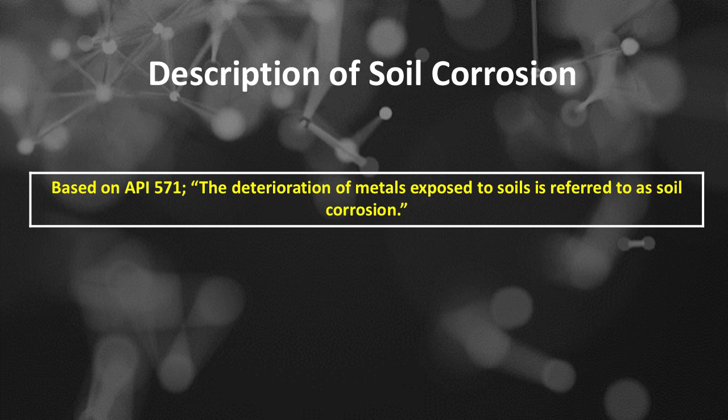Soil corrosion damage mechanisms as a part of uniform or localized loss of thickness. Description based on API 571: the deterioration of metals exposed to soils is referred to as soil corrosion. It refers to the degradation of materials, particularly metals, as a result of electrochemical reactions occurring in soil environments, influenced by various soil characteristics and environmental factors, making it a significant concern for infrastructure such as pipelines, foundations, and buried structures.

Here are key aspects of soil corrosion damage. Number 1 is mechanisms of soil corrosion. Electrochemical reactions: soil acts as an electrolyte, facilitating electrochemical reactions between metallic surfaces and corrosive ions present in the soil. These reactions can result in the loss of metal mass over time.

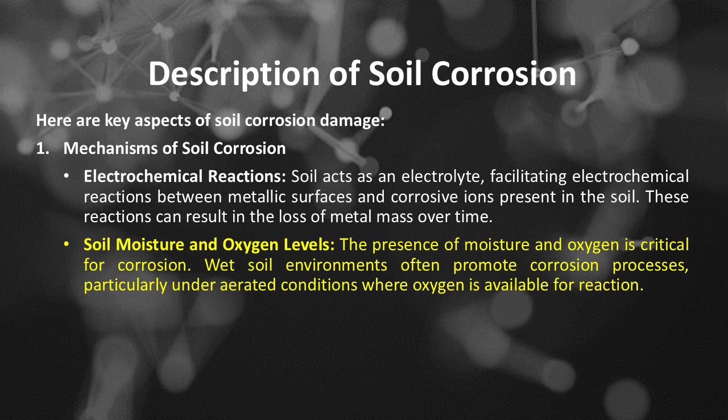Soil moisture and oxygen levels: the presence of moisture and oxygen is critical for corrosion. Wet soil environments often promote corrosion processes, particularly under aerated conditions where oxygen is available for reaction. Soil pH: the acidity or alkalinity of the soil affects corrosion rates. Acidic soils, low pH, are typically more corrosive due to higher concentrations of hydrogen ions, while alkaline soils, high pH, may offer some protection.

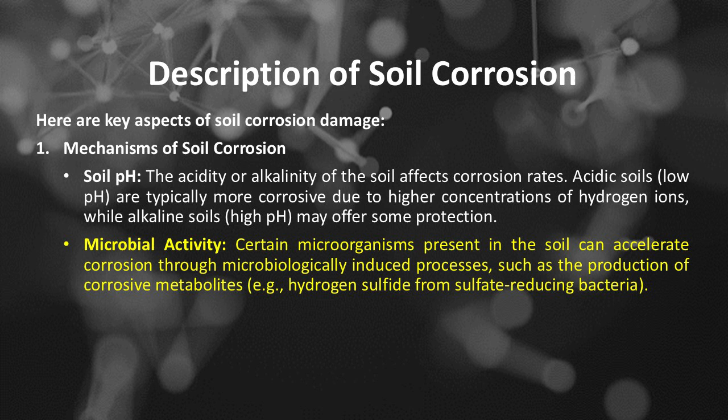Microbial activity: certain microorganisms present in the soil can accelerate corrosion through microbiologically induced processes, such as the production of corrosive metabolites, such as hydrogen sulfide from sulfate-reducing bacteria.

Number 2 is types of soil corrosion. Uniform corrosion: a relatively uniform loss of material occurs across the surface of the metal, usually resulting from direct exposure to corrosive soil conditions. Pitting corrosion: localized areas of corrosion can develop into pits, which leads to significant localized thinning and weakening of the metal. This type of damage can be particularly dangerous for structural and pressure-containing components.

Galvanic corrosion occurs when dissimilar metals are in electrical contact and buried in soil, leading to accelerated corrosion of the less noble metal. Crevice corrosion can occur in areas where soil becomes trapped, leading to stagnant conditions that promote localized corrosion, particularly in joints, seams, or fittings. Number 3 is factors influencing soil corrosion.

Soil composition: the presence of salts, such as chlorides and sulfates, can be highly corrosive. Organic materials and varying clay content also influence soil conductivity and corrosion processes. Temperature: increasing temperatures can enhance microbial activity, accelerating corrosion rates. Electrical resistance: soils with high resistivity, such as dry, sandy soils, may exhibit lower corrosion rates than highly conductive soils, such as wet, clay-rich soils.

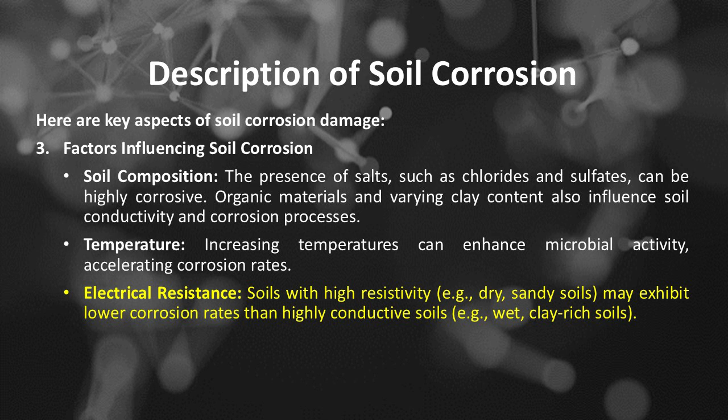Number 4 is consequences of soil corrosion. Structural damage: corrosion can lead to the failure of buried pipelines, underground tanks, and foundations, causing leaks, collapses, and environmental contamination. Economic costs: maintenance, repair, and replacement of corroded infrastructure result in significant economic costs. Additionally, unplanned service interruptions can disrupt operations and lead to financial losses.

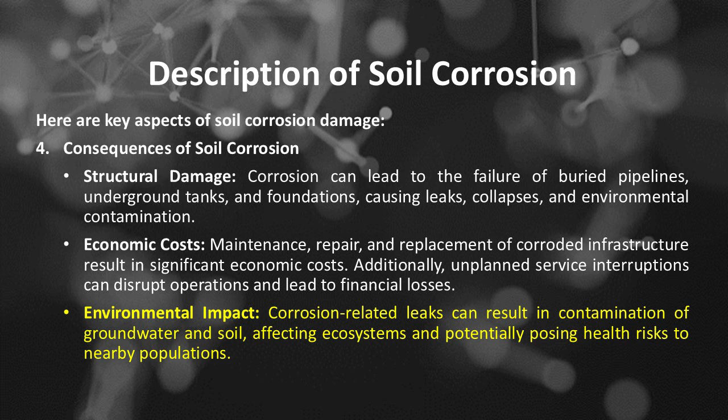Environmental impact: corrosion-related leaks can result in contamination of groundwater and soil, affecting ecosystems and potentially posing health risks to nearby populations. In conclusion, soil corrosion is a complex issue that can lead to significant material degradation and structural failures. Understanding its mechanisms and influencing factors is essential for implementing effective detection and mitigation strategies, ensuring the integrity and longevity of buried structures and infrastructure over time.

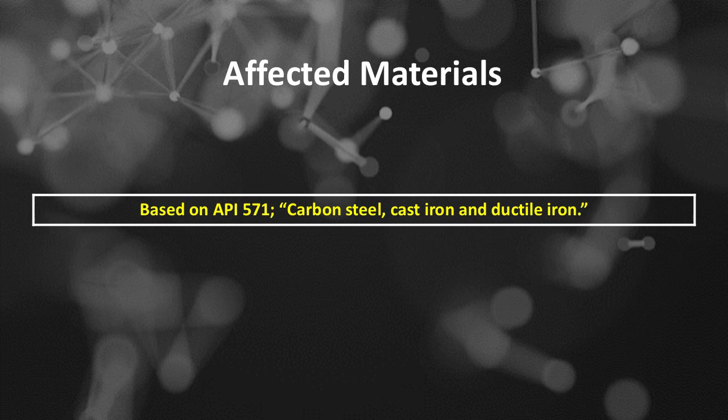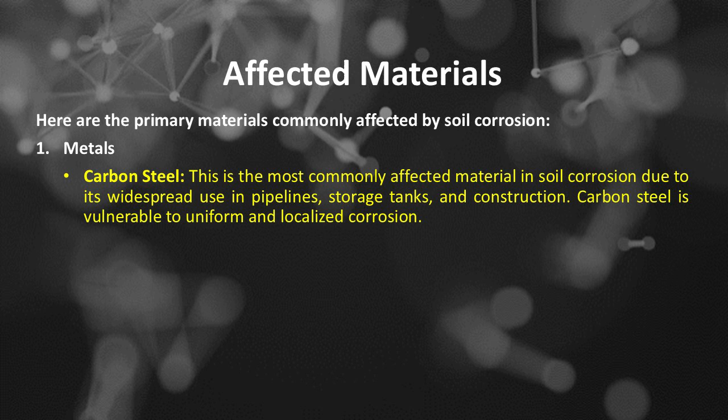Soil corrosion affected materials based on API 571: carbon steel, cast iron, and ductile iron. Soil corrosion can affect a variety of materials, particularly those used in underground applications and infrastructure. Here are the primary materials commonly affected. Number 1 is metals. Carbon steel is the most commonly affected material in soil corrosion due to its widespread use in pipelines, storage tanks, and construction. Carbon steel is vulnerable to uniform and localized corrosion.

Cast iron, often used for pipes in sewage and water distribution systems, can corrode due to soil conditions such as moisture, acidity, and microbial activity. Copper is generally resistant to corrosion, but can still be affected in some soil environments, particularly due to galvanic corrosion when in contact with other metals.

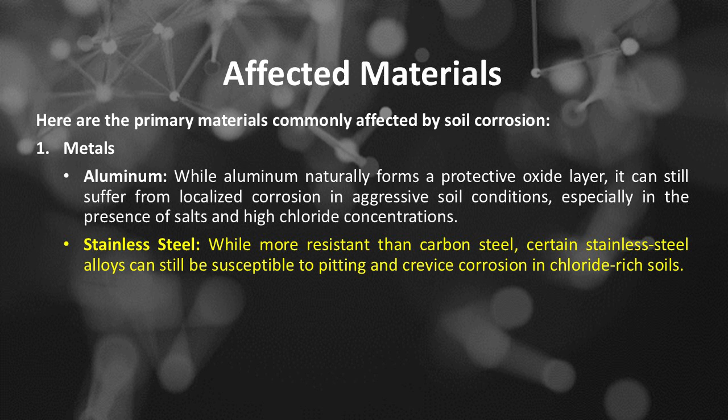Aluminum naturally forms a protective oxide layer, but it can still suffer from localized corrosion in aggressive soil conditions, especially in the presence of salts and high chloride concentrations. Stainless steel, while more resistant than carbon steel, certain stainless steel alloys can still be susceptible to pitting and crevice corrosion in chloride-rich soils.

Number 2 is composites and reinforced materials. Reinforced concrete: the steel reinforcement bars, rebar, within concrete are susceptible to corrosion, particularly when exposed to moisture and chlorides that can penetrate and compromise the protective alkalinity of the concrete.

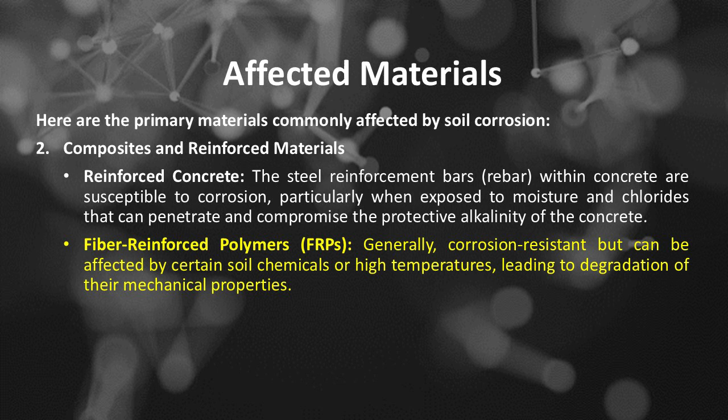Fiber-reinforced polymers (FRPs) are generally corrosion-resistant but can be affected by certain soil chemicals or high temperatures, leading to degradation of their mechanical properties. Number 3 is coatings and liners.

Protective coatings, even the most robust like epoxy or polyurethane, can suffer degradation over time, especially if moisture penetrates underlying layers or if there are defects in the application. Polymeric liners, used to protect metal surfaces from corrosion, can degrade over time due to chemical exposure, soil abrasion, or mechanical damage.

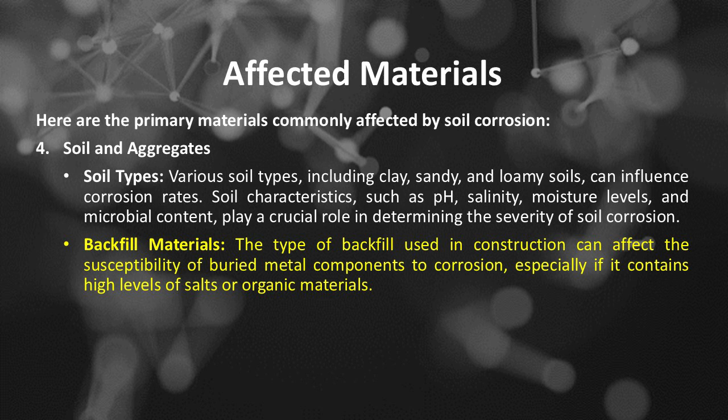Number 4 is soil and aggregates. Various soil types, including clay, sandy, and loamy soils, can influence corrosion rates. Soil characteristics such as pH, salinity, moisture levels, and microbial content play a crucial role in determining the severity of soil corrosion. The type of backfill used in construction can affect the susceptibility of buried metal components to corrosion, especially if it contains high levels of salts or organic materials.

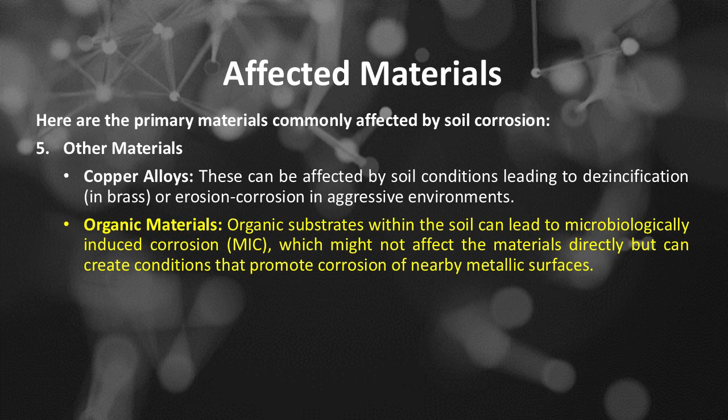Number 5 is other materials. Copper alloys can be affected by soil conditions leading to dezincification in brass, or erosion corrosion in aggressive environments. Organic substrates within the soil can lead to microbiologically induced corrosion, or MIC, which might not affect the materials directly but can create conditions that promote corrosion of nearby metallic surfaces.

Key takeaways: soil corrosion can impact a broad range of materials, but metals, particularly carbon steel, copper, and stainless steel, are the most commonly affected. The severity and type of corrosion depend on various factors, including soil characteristics, moisture levels, and the presence of corrosive agents. Implementing proper material selection, protective measures, and regular monitoring can help mitigate the risks associated with soil corrosion.

Soil corrosion critical factors based on API 571, Number A: the severity of soil corrosion is determined by many factors including operating temperature, moisture and oxygen availability, soil resistivity, soil condition and characteristics, soil type, water drainage and homogeneity, variation in soil type, cathodic protection, stray current drainage, and coating type, age, and condition.

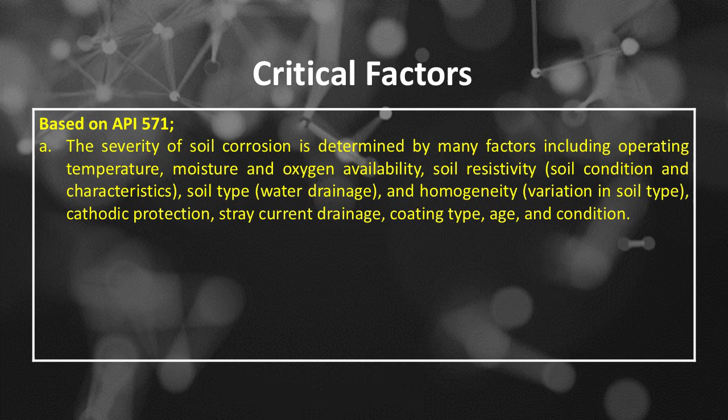Number B: There is no single parameter that can be used to determine soil corrosivity. Instead, a number of characteristics must be combined to estimate the corrosion in a particular soil, as outlined in ASTM STP 741, as well as API RP 580 and API RP 581.

Number C: Soil resistivity is frequently used to estimate soil corrosivity, mainly because it is easy to measure. Soil resistivity is related to soil moisture content and dissolved electrolytes in the soil water. Number D: Soils having high moisture content, high dissolved salt concentrations, and high acidity are usually the most corrosive.

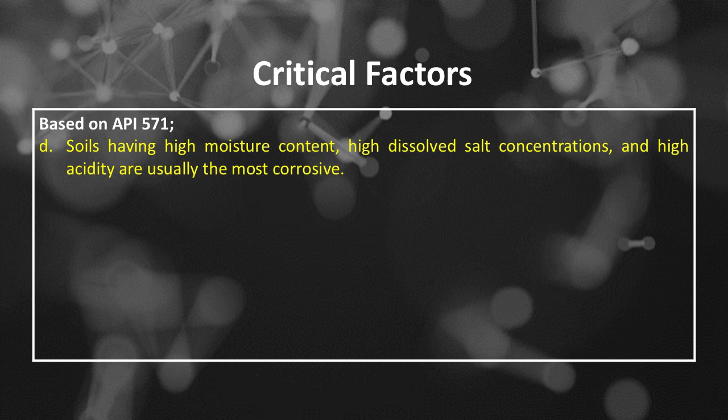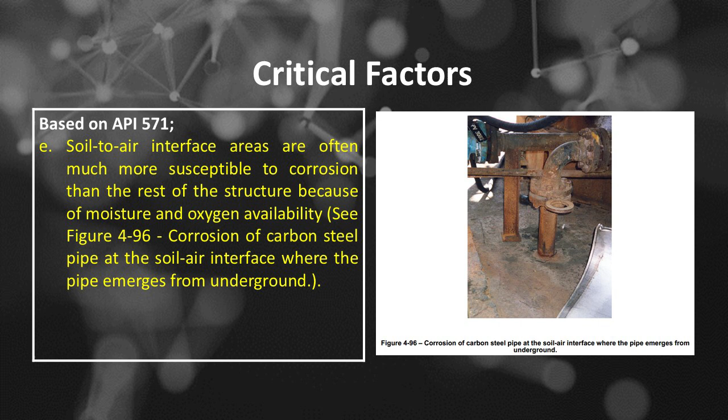Number E: Soil-to-air interface areas are often much more susceptible to corrosion than the rest of the structure because of moisture and oxygen availability. See Figure 4-96, corrosion of carbon steel pipe at the soil-air interface where the pipe emerges from underground. Number F: Corrosion rates increase with increasing metal temperature.

Number G: Other factors that affect soil corrosion include galvanic corrosion, dissimilar soils, stray currents, differential aeration corrosion cells, and microbiologically induced corrosion.

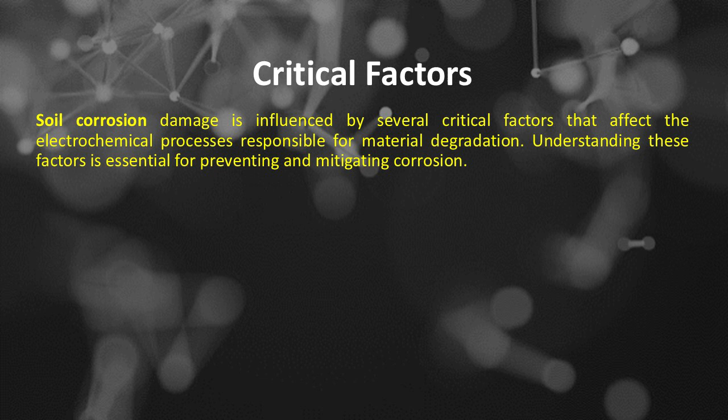Soil corrosion damage is influenced by several critical factors that affect the electrochemical processes responsible for material degradation. Understanding these factors is essential for preventing and mitigating corrosion. Here are the key critical factors of soil corrosion.

Number 1 is soil composition. Soil type: the composition of the soil, whether clay, sand, loam, or silt, determines its moisture retention, pH, and chemical reactivity, all of which contribute to corrosion rates.

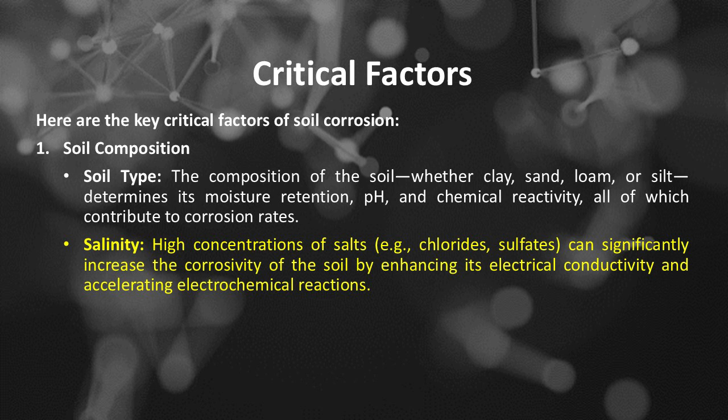Salinity: high concentrations of salts, such as chlorides and sulfates, can significantly increase the corrosivity of the soil by enhancing its electrical conductivity and accelerating electrochemical reactions. Organic content: the presence of organic materials can lead to microbiologically influenced corrosion, or MIC, where bacteria produce corrosive compounds that attack metal surfaces.

Number 2 is soil moisture. Water content: the presence of moisture is critical for most corrosion processes. Excess water can facilitate the movement of corrosive ions and promote electrochemical reactions. Drainage conditions: well-drained soils that retain less moisture can be less corrosive than poorly drained soils, which maintain saturated conditions that support corrosion.

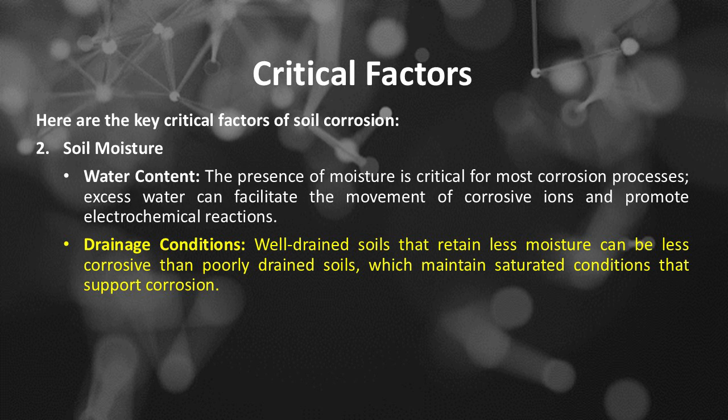Number 3 is pH level. Acidity or alkalinity: soil pH affects the corrosiveness of the environment. Acidic soils, pH less than 7, tend to be more aggressive due to higher concentrations of hydrogen ions, while alkaline soils, pH greater than 7, can sometimes offer protective effects for certain materials.

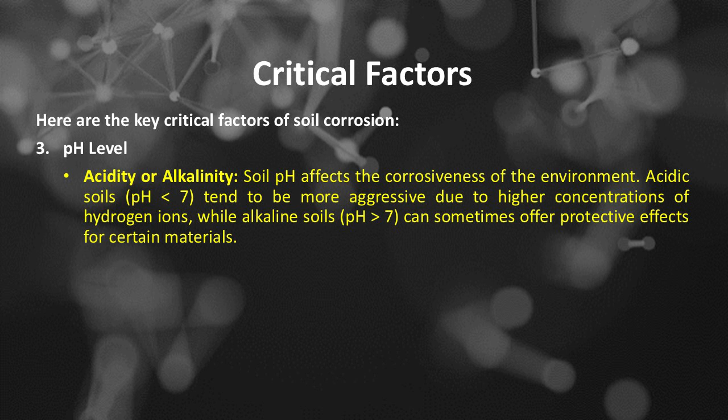Number 4 is redox potential. Oxidation-reduction reactions: the soil's oxidation-reduction potential, EH, indicates its capacity to support electrochemical reactions.

Low redox potential environments, often found in anaerobic conditions, can be particularly conducive to corrosion, especially for metals.

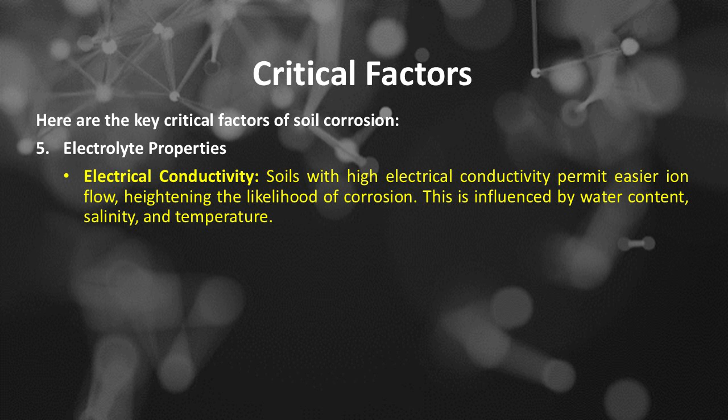Number 5 is electrolyte properties. Electrical conductivity: soils with high electrical conductivity permit easier ion flow, heightening the likelihood of corrosion. This is influenced by water content, salinity, and temperature.

Number 6 is temperature. Thermal effects: higher temperatures can accelerate corrosion processes by increasing reaction rates and enhancing microbial activity. Seasonal variations can also affect temperature and, subsequently, corrosion rates.

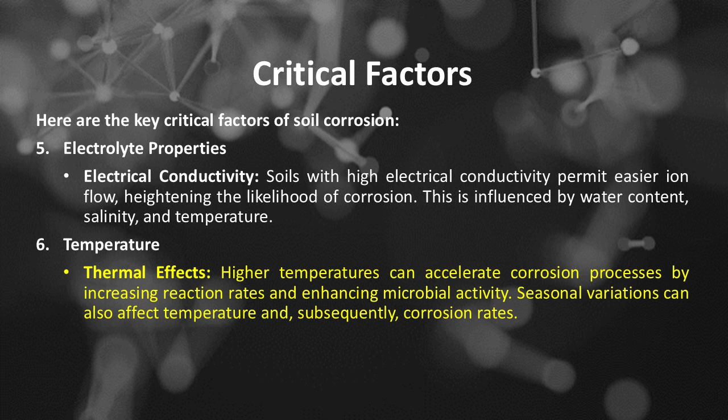Number 7 is microbial activity. Microorganisms, the presence of bacteria and fungi can influence soil corrosion. Specific bacteria can produce acidic byproducts or other corrosive metabolites, facilitating corrosion processes.

Number 8 is soil aeration. Oxygen availability: aerated soils can support corrosion due to the presence of oxygen, which is essential for many electrochemical reactions. Conversely, anaerobic environments may slow down corrosion processes in certain conditions.

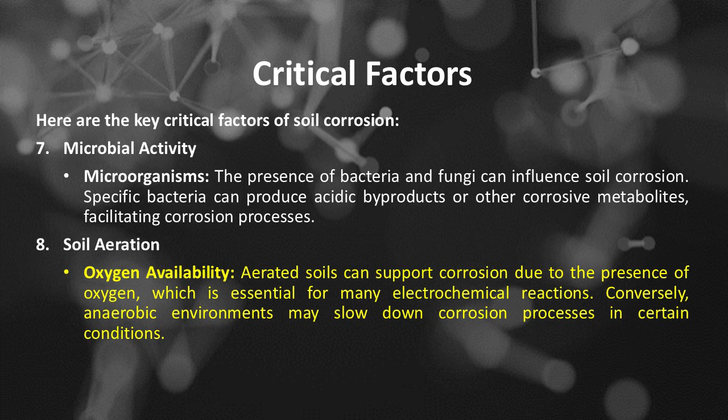Number 9 is material properties. Material composition and microstructure: different metals and alloys exhibit varying degrees of resistance to corrosion based on their composition, microstructure, inherent protective coatings, and passive oxide layers. Surface conditions: surface roughness, cleanliness, and the presence of protective coatings affect susceptibility to corrosion.

Number 10 is geological factors. Soil compaction: compacted soils can reduce moisture retention but may also trap corrosive agents against metal surfaces, potentially exacerbating localized corrosion. Soil variation: variability in soil composition and properties across a site can lead to uneven corrosion rates in infrastructure.

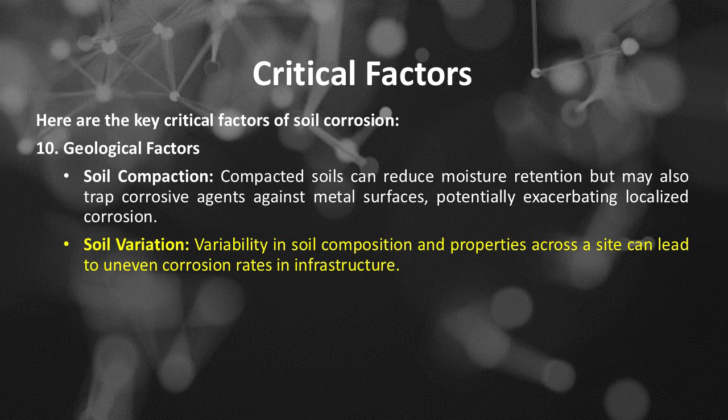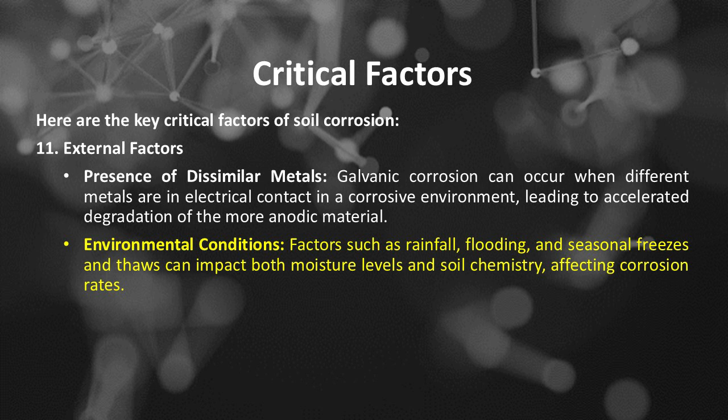Environmental conditions: factors such as rainfall, flooding, and seasonal freezes and thaws can impact both moisture levels and soil chemistry, affecting corrosion rates. In conclusion, soil corrosion damage is a multifaceted issue influenced by a variety of factors that interact with one another.

By understanding these critical factors, engineers and maintenance personnel can better design, monitor, and maintain buried structures and infrastructure to reduce the risks associated with soil corrosion. Regular assessments and mitigation strategies based on these factors are essential for the longevity and integrity of affected materials.

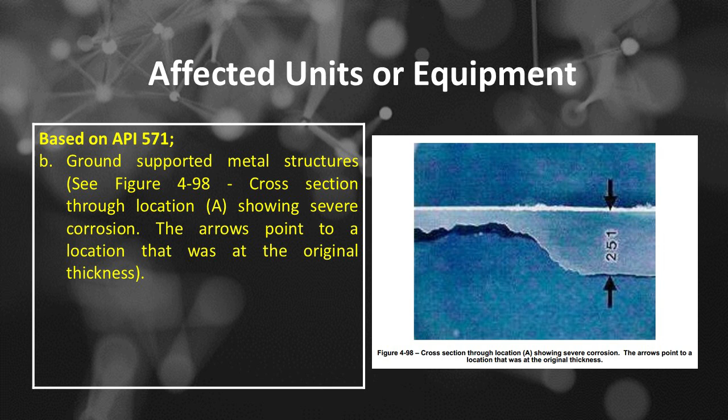The external surface is shown. Number B, ground-supported metal structures, see Figure 4-98: cross-section through location A, showing severe corrosion. The arrows point to a location that was at the original thickness.

Soil corrosion can have significant impacts on various units, equipment, and infrastructure that are buried or in direct contact with the soil. Here are some of the primary units and types of equipment commonly affected by soil corrosion.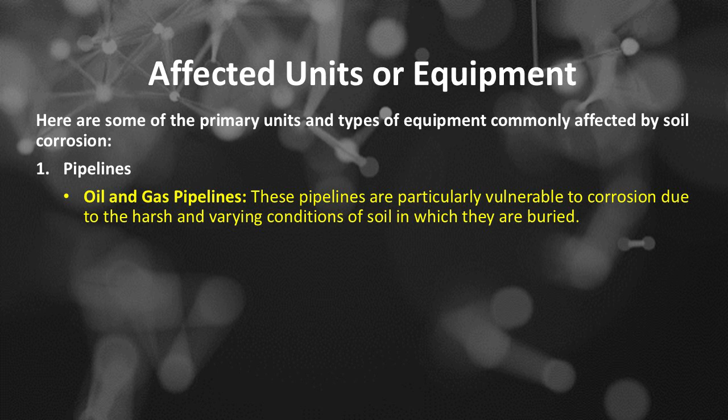Number 1 is pipelines. Oil and gas pipelines: these pipelines are particularly vulnerable to corrosion due to the harsh and varying conditions of soil in which they are buried. Water and sewage pipes: both cast iron and steel water lines can experience significant corrosion, leading to leaks and contamination.

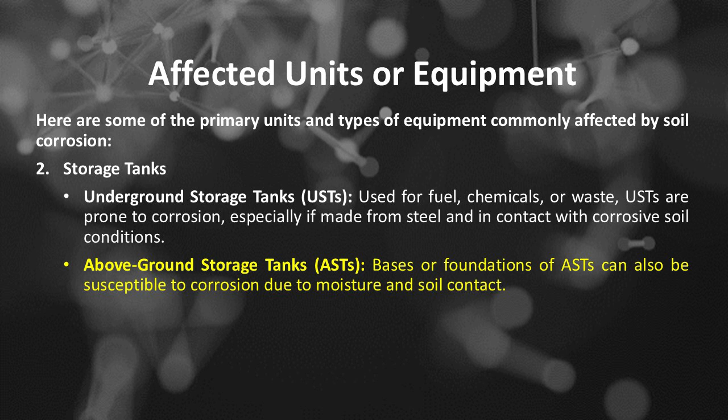Number 2 is storage tanks. Underground storage tanks, USTs, used for fuel, chemicals, or waste are prone to corrosion, especially if made from steel and in contact with corrosive soil conditions. Above-ground storage tanks, ASTs: bases or foundations of ASTs can also be susceptible to corrosion due to moisture and soil contact.

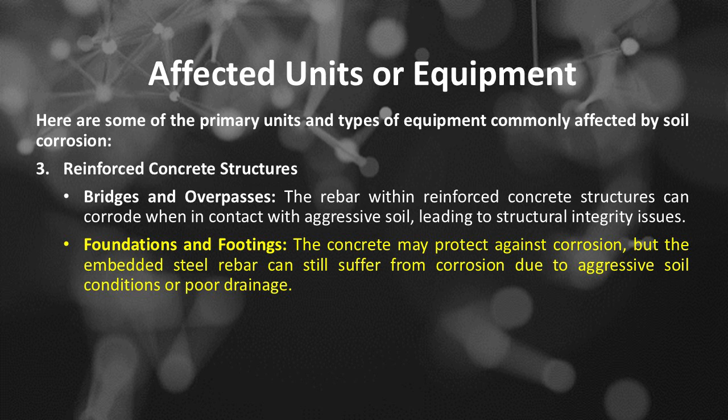Number 3 is reinforced concrete structures. Bridges and overpasses: the rebar within reinforced concrete structures can corrode when in contact with aggressive soil, leading to structural integrity issues. Foundations and footings: the concrete may protect against corrosion, but the embedded steel rebar can still suffer from corrosion due to aggressive soil conditions or poor drainage.

Number 4 is civil engineering structures. Retaining walls: wall anchors and reinforcements can be compromised by soil corrosion, affecting structural stability. Dams and levees: embedded steel components or foundations can be susceptible to corrosion from the surrounding soil.

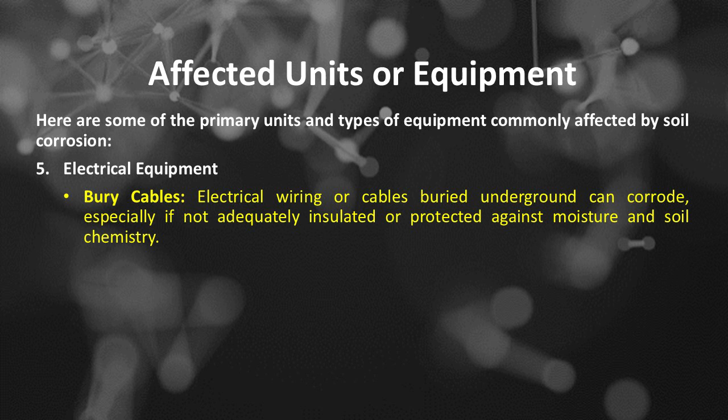Number 5 is electrical equipment. Buried cables: electrical wiring or cables buried underground can corrode, especially if not adequately insulated or protected against moisture and soil chemistry. Grounding systems: ground rods and connections can corrode, leading to ineffective grounding and increased electrical resistance.

Number 6 is agricultural equipment. Irrigation systems: pipes and fittings used in irrigation can be subject to corrosion, particularly when in contact with saline or acidic soils.

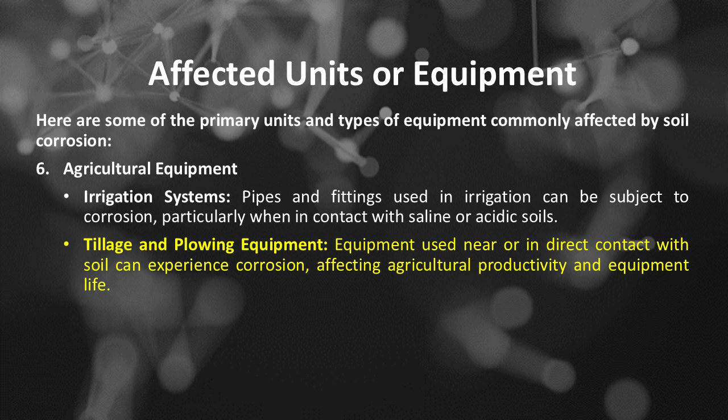Tillage and plowing equipment used near or in direct contact with soil can experience corrosion, affecting agricultural productivity and equipment life. Number 7 is transportation infrastructure.

Railway tracks and sleepers: metal components of rail systems, including tracks and attachments, can be compromised due to soil corrosion. Foundation supports: steel supports and pylons for roads, bridges, and tunnels can experience corrosion damage when in contact with moist soil. Number 8 is cultural and historical artifacts.

Archaeological finds: metal artifacts buried in soil can be prone to corrosion, especially if they are made from iron or other susceptible materials. Number 9 is ducts and plumbing.

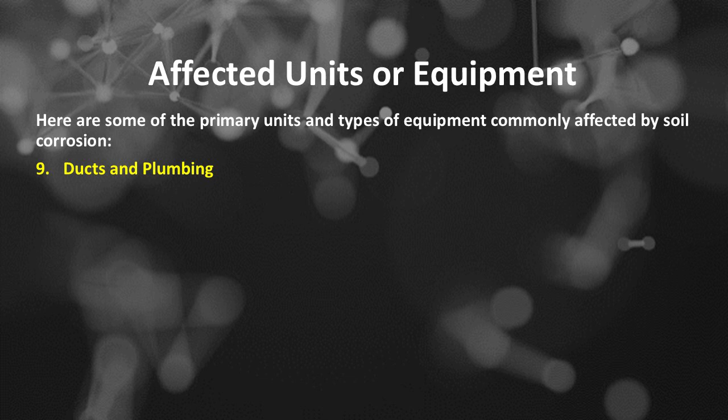Ventilation ducts: even non-metallic ducts can be indirectly affected by corrosion due to moisture and chemical interactions within the soils they are buried near. Sewer systems: pipes and fittings in sewer systems are vulnerable to corrosion from both soil and the waste they carry.

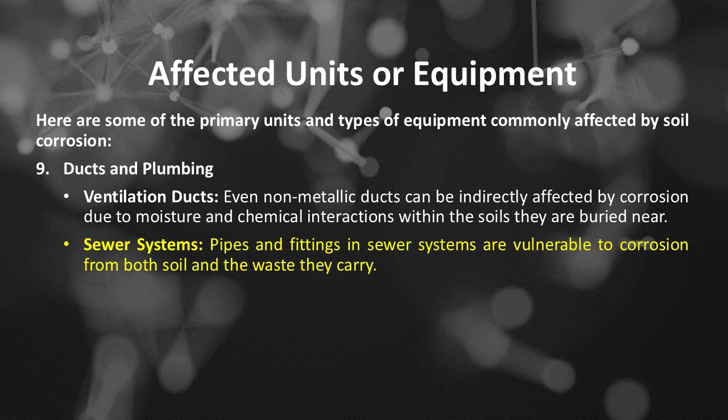Number 10 is fuel distribution systems. Service station pumps and piping: corrosion can affect underground piping used for distributing gasoline or other fuels, leading to leaks and environmental hazards.

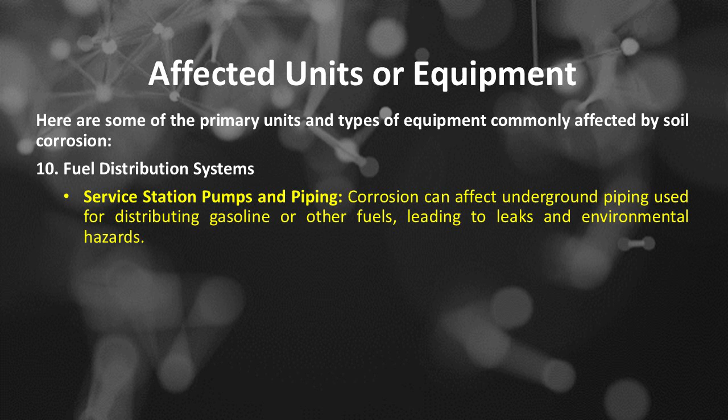Number 11 is foundational elements of buildings. Building foundations: steel reinforcements in foundations can corrode, potentially leading to structural failures over time.

In conclusion, soil corrosion can impact a wide range of units and equipment, particularly those that are buried or permanently installed in the ground. Its effects can lead to costly repairs, structural failures, and safety hazards, emphasizing the importance of understanding soil characteristics and employing proper protective measures to mitigate corrosion risks. Regular monitoring and maintenance of affected infrastructure are crucial to prolonging the lifespan and ensuring the integrity of these materials and systems.

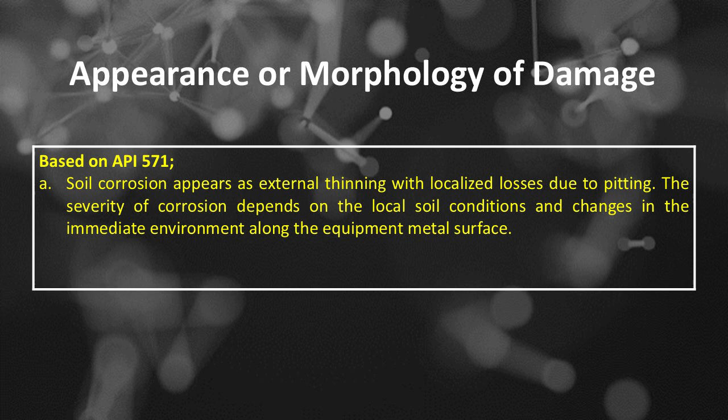Appearance or morphology of soil corrosion damage based on API 571. Number A: soil corrosion appears as external thinning with localized losses due to pitting. The severity of corrosion depends on the local soil conditions and changes in the immediate environment along the equipment metal surface. Number B: poor condition of a protective coating is a telltale sign of potential corrosion damage.

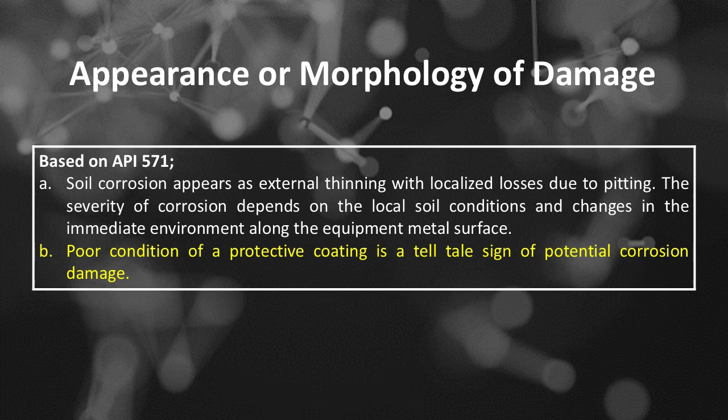The appearance or morphology of soil corrosion damage can vary widely depending on several factors, including the materials involved, soil composition, environmental conditions, and the specific corrosion mechanisms at play. Here are some common characteristics and forms of corrosion damage that can be observed.

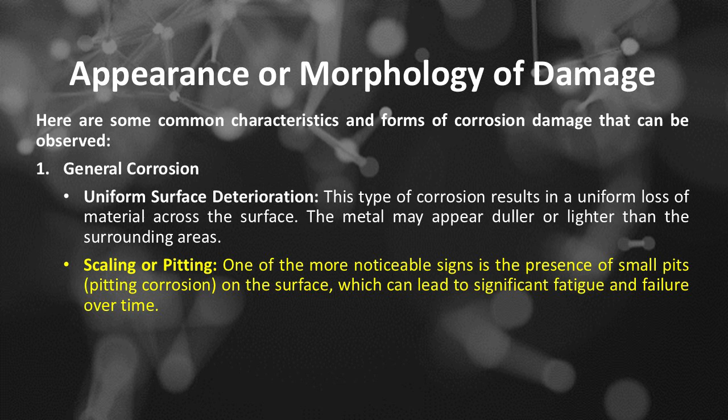Number 1 is general corrosion. Uniform surface deterioration: this type of corrosion results in a uniform loss of material across the surface. The metal may appear duller or lighter than the surrounding areas. Scaling or pitting: one of the more noticeable signs is the presence of small pits, pitting corrosion, on the surface, which can lead to significant fatigue and failure over time.

Number 2 is pitting corrosion. Localized holes and pits: pitting creates small but deep holes or pits in the metal surface. These can occur in clusters or as solitary defects, often leading to structural weakness without significant material loss elsewhere. Irregular pit shapes: the pits are typically irregular, often resembling tiny craters. Their depth can be significant compared to their diameter.

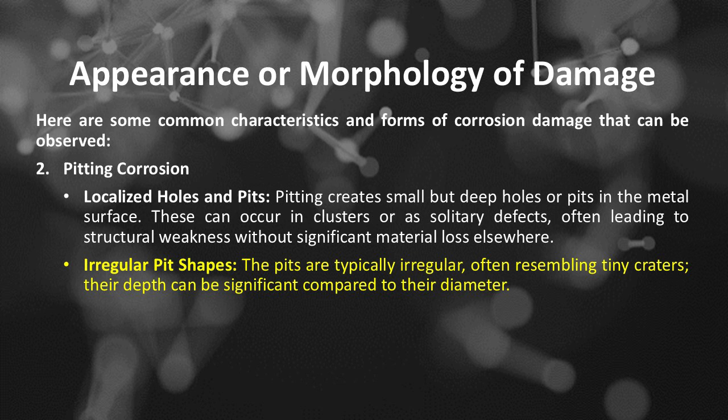Number 3 is galvanic corrosion. Different corrosion rates: when different metals are in electrical contact in a corrosive environment, one metal may corrode significantly faster than the other. The affected metal surfaces may show uneven corrosion patterns, often with more rapid deterioration at the contact points. Discoloration: galvanic corrosion may cause discoloration and reveal a clear distinction between the two metals due to differing corrosion rates.

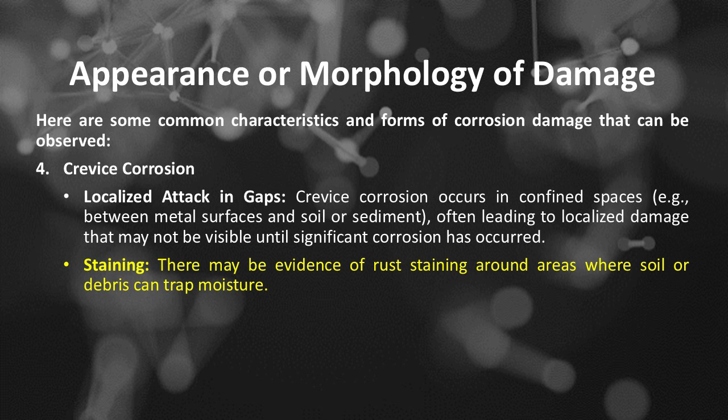Number 4 is crevice corrosion. Localized attack in gaps: crevice corrosion occurs in confined spaces, such as between metal surfaces and soil or sediment, often leading to localized damage that may not be visible until significant corrosion has occurred. Staining: there may be evidence of rust staining around areas where soil or debris can trap moisture.

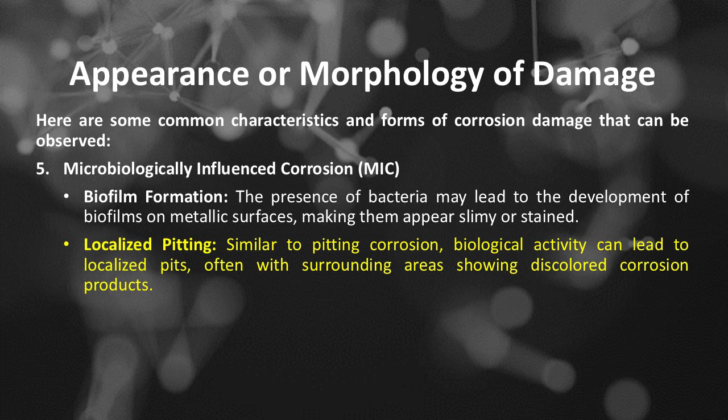Number 5 is microbiologically influenced corrosion, or MIC. Biofilm formation: the presence of bacteria may lead to the development of biofilms on metallic surfaces, making them appear slimy or stained. Localized pitting: similar to pitting corrosion, biological activity can lead to localized pits, often with surrounding areas showing discolored corrosion products. Number 6 is corrosion products.

Oxides and hydrated salts: depending on the metal type and soil conditions, corrosion can result in oxides, such as iron oxide, or hydrated salts that may accumulate on surfaces, leading to flaking or scaling. Reddish-brown or greenish stains: rust, iron oxide, can create reddish-brown stains, while copper corrosion may produce green patinas, copper carbonate.

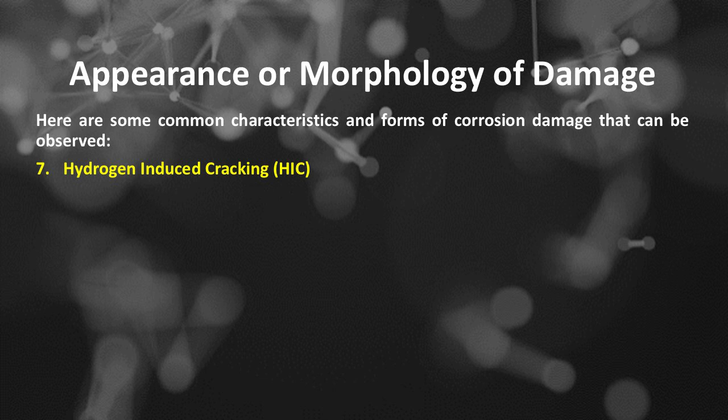Number 7 is hydrogen-induced cracking, or HIC. Reading cracks.

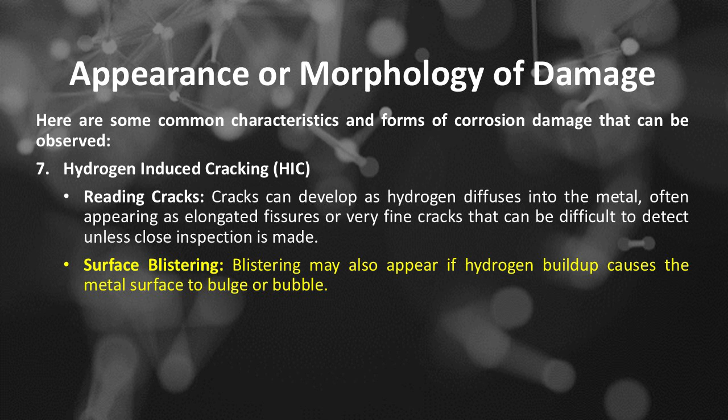Cracks can develop as hydrogen diffuses into the metal, often appearing as elongated fissures or very fine cracks that can be difficult to detect unless close inspection is made. Surface blistering may also appear if hydrogen buildup causes the metal surface to bulge or bubble.

Number 8 is spalling and flaking, fragmentation of material. The surface of corroded materials may begin to flake or spall off, creating uneven, jagged edges and exposing more susceptible areas to further corrosion.

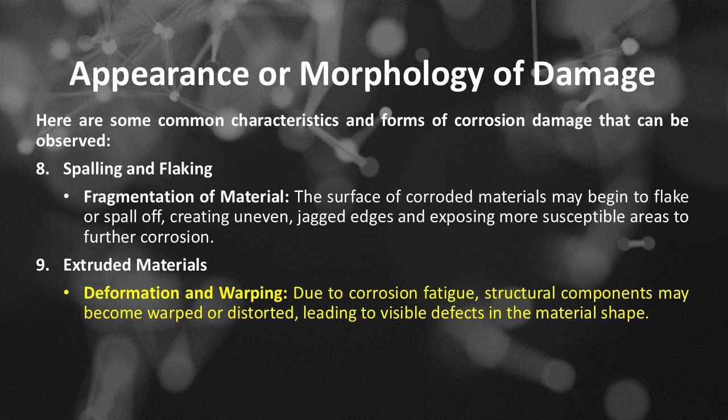Number 9 is extruded materials, deformation and warping. Due to corrosion fatigue, structural components may become warped or distorted, leading to visible defects in the material shape. Number 10 is signs of leakage or failure.

Fluid leakages. For pipes and tanks, visible leaks or wet spots in the soil may indicate significant corrosion and impending failure of containment. In conclusion, the appearance and morphology of soil corrosion damage can manifest in various ways, often depending on the specific environmental and material conditions.

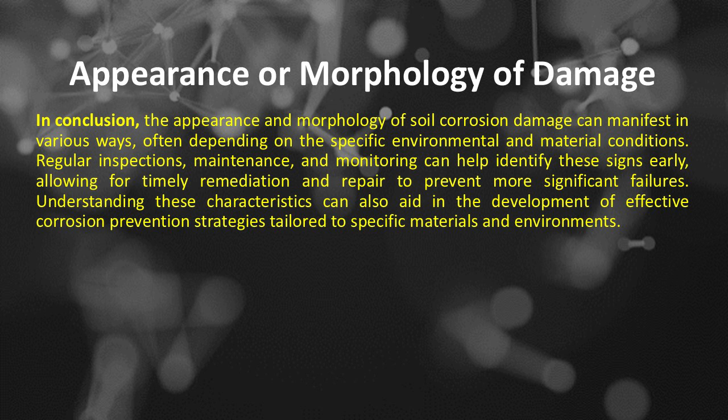Regular inspections, maintenance, and monitoring can help identify these signs early, allowing for timely remediation and repair to prevent more significant failures. Understanding these characteristics can also aid in the development of effective corrosion prevention strategies tailored to specific materials and environments.

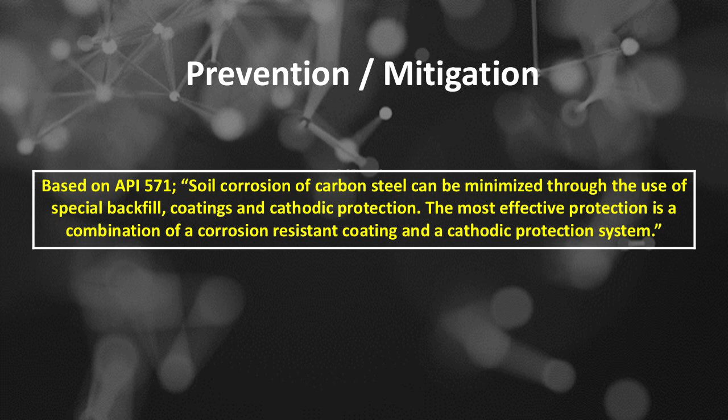Soil corrosion damage prevention and mitigation based on API 571: soil corrosion of carbon steel can be minimized through the use of special backfill, coatings and cathodic protection. The most effective protection is a combination of a corrosion-resistant coating and a cathodic protection system.

Preventing and mitigating soil corrosion damage is crucial for maintaining the integrity and lifespan of buried structures, pipelines, and other equipment. Here are several strategies that can be employed to manage soil corrosion effectively. Number 1 is material selection.

Corrosion-resistant materials: use materials that inherently resist corrosion, such as stainless steel, copper, or specialized alloys, for pipelines and storage tanks. Coatings and linings: apply protective coatings, e.g. epoxy, polyurethane, or linings to metal surfaces to provide a barrier against corrosive soil conditions.

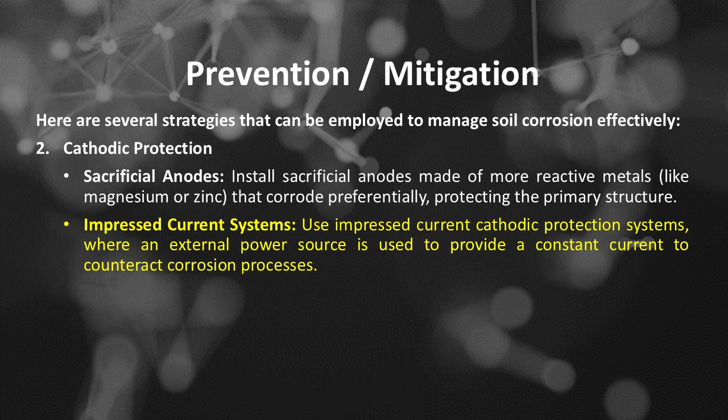Number 2 is cathodic protection. Sacrificial anodes: install sacrificial anodes made of more reactive metals, like magnesium or zinc, that corrode preferentially, protecting the primary structure. Impressed current systems: use impressed current cathodic protection systems, where an external power source is used to provide a constant current to counteract corrosion processes.

Number 3 is soil management. Soil testing and analysis: regularly analyze soil for pH, moisture content, and resistivity to understand its corrosiveness and tailor protection strategies appropriately. Soil conditioning: modify soil properties, such as through the addition of bentonite or other stabilizers, to reduce corrosivity.

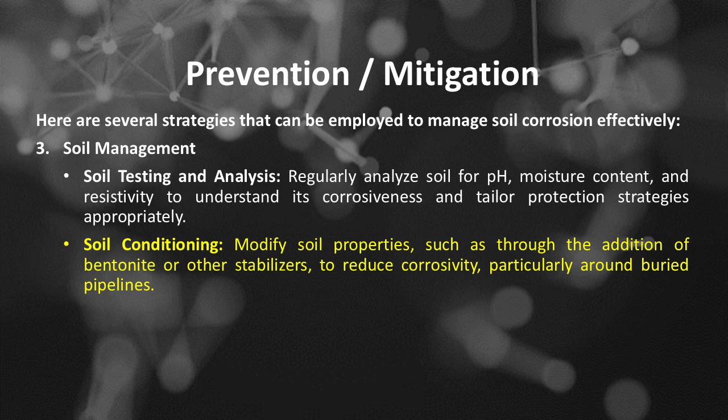Particularly around buried pipelines. Number 4 is proper drainage. Install drainage systems: ensure proper drainage around critical infrastructure to minimize water accumulation, reducing the moisture content that leads to more aggressive corrosion. Elevate structures: when possible, elevate structures above ground level or ensure sufficient backfill to keep them out of direct contact with moisture-laden soils.

Number 5 is burying techniques. Encapsulation: use protective sleeves or wrapping for underground piping and cables to minimize direct contact with corrosive soil. Proper depth: bury pipelines and structures at appropriate depths where soil temperatures and conditions are less aggressive.

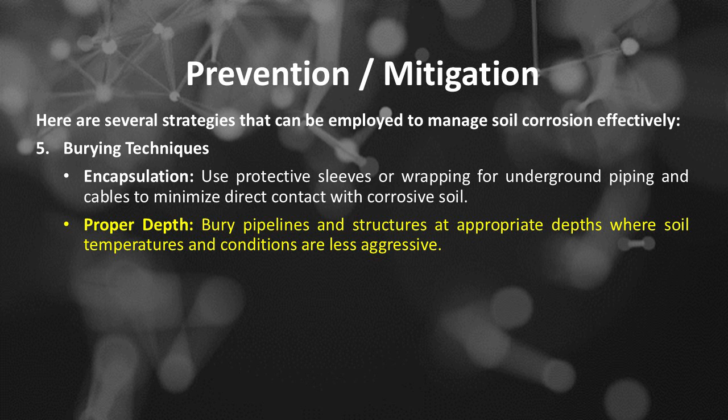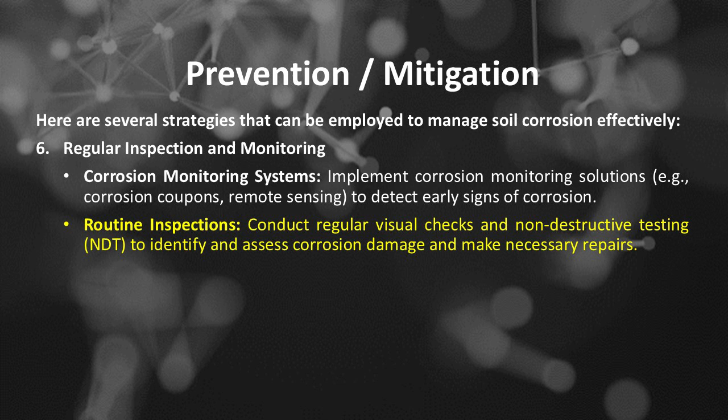Number 6 is regular inspection and monitoring. Corrosion monitoring systems: implement corrosion monitoring solutions, such as corrosion coupons, remote sensing, to detect early signs of corrosion. Routine inspections: conduct regular visual checks and non-destructive testing, NDT, to identify and assess corrosion damage and make necessary repairs.

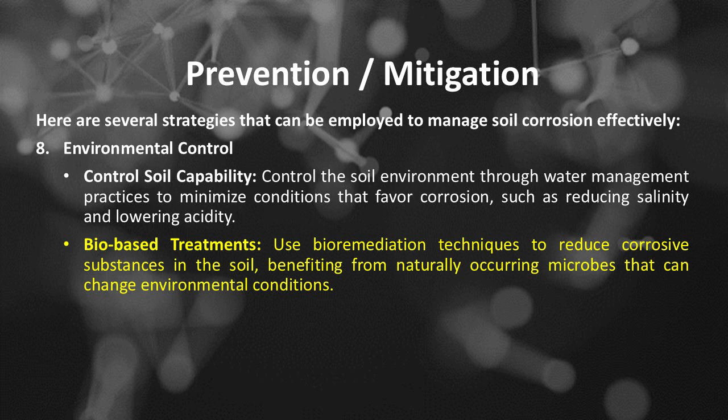Number 8 is environmental control. Control soil capability: control the soil environment through water management practices to minimize conditions that favor corrosion, such as reducing salinity and lowering acidity. Bio-based treatments: use bioremediation techniques to reduce corrosive substances in the soil, benefiting from naturally occurring microbes that can change environmental conditions.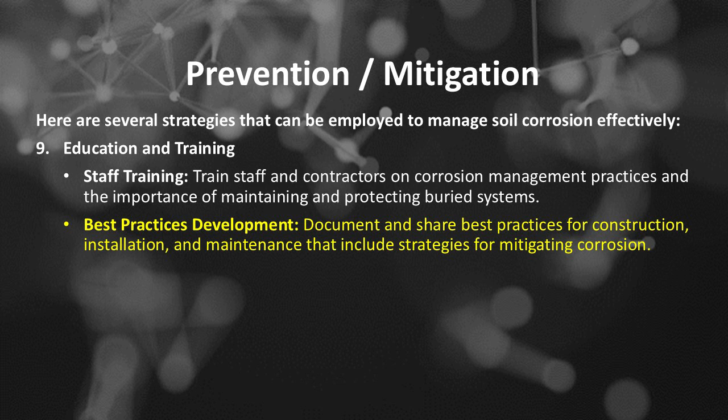Number 9 is education and training. Staff training: train staff and contractors on corrosion management practices and the importance of maintaining and protecting buried systems. Best practices development: document and share best practices for construction, installation, and maintenance that include strategies for mitigating corrosion.

Number 10 is design considerations. Engineering design: involve corrosion engineering during the design phase of structures to ensure that proper materials and protective measures are in place from the outset. Redundant systems: design redundant systems or protect critical components to maintain functionality even if some parts experience corrosion damage.

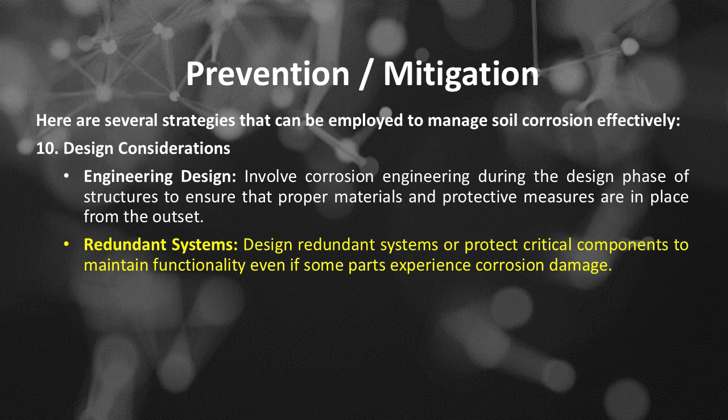In conclusion, effective prevention and mitigation of soil corrosion require a proactive and multifaceted approach that combines material selection, protective techniques, environmental management, and regular monitoring.

Awareness and education about corrosion risks, coupled with timely maintenance and appropriate technologies, can significantly extend the lifespan of buried infrastructure and reduce the overall costs associated with corrosion damage.

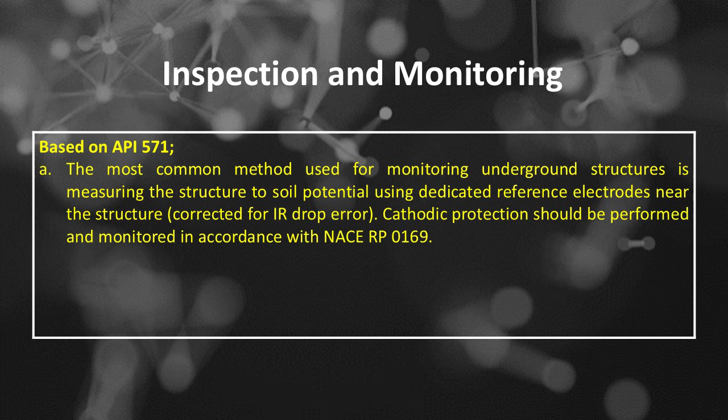Soil corrosion inspection and monitoring method based on API 571, Number A. The most common method used for monitoring underground structures is measuring the structure to soil potential using dedicated reference electrodes near the structure, corrected for IR drop error. Cathodic protection should be performed and monitored in accordance with NACE RP 0169.

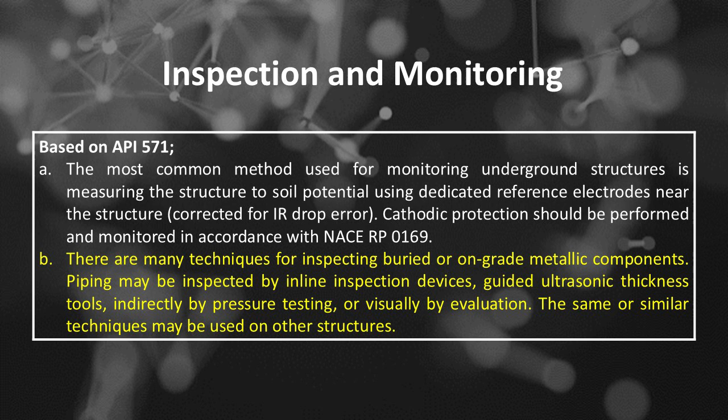Number B. There are many techniques for inspecting buried or on-grade metallic components. Piping may be inspected by inline inspection devices, guided ultrasonic thickness tools, indirectly by pressure testing, or visually by evaluation. The same or similar techniques may be used on other structures.

Inspection and monitoring methods for detecting soil corrosion damage are essential to ensure the integrity of buried infrastructure, such as pipelines, tanks, and other metal structures. These methods can help identify early signs of corrosion and allow for timely intervention. Here are several common techniques used for inspection and monitoring of soil corrosion.

Number 1 is visual inspection. Surface examination: inspect visible parts of pipelines and above-ground structures for signs of corrosion like rust, pitting, or discoloration. Soil surface assessment: look for signs of soil disturbance, leaks, or unusual vegetation that might indicate corrosion-related failures.

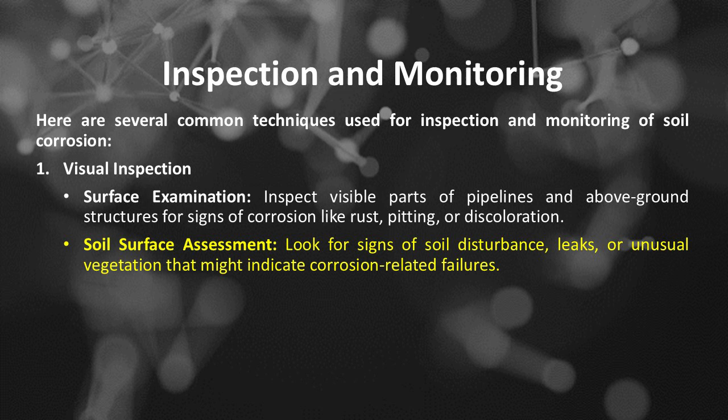Number 2 is soil testing. Soil sampling: collect soil samples from around buried structures for analysis of pH, resistivity, moisture content, and corrosive elements, like sulfates or chlorides. Corrosivity testing: utilize soil corrosion tests to assess the likelihood of corrosion based on chemical properties.

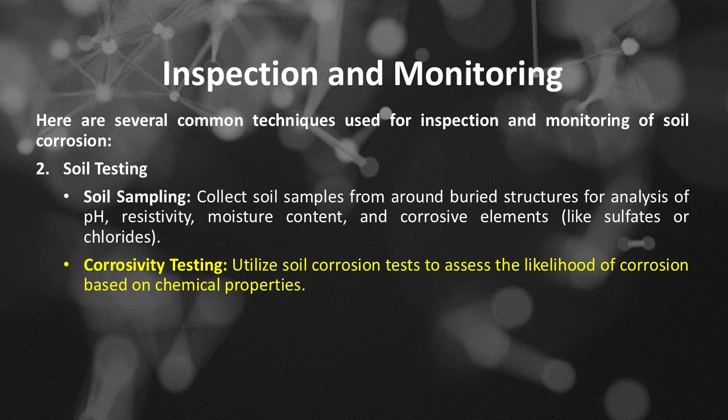Number 3 is corrosion coupons. Use of coupons: install metal coupons made of the same or similar materials as the protected structure in the soil. These coupons corrode at a rate representative of the environment and can be periodically removed and measured for weight loss. Measurement techniques: weigh the coupons before and after exposure to determine the corrosion rate.

Number 4 is electrochemical techniques. Linear polarization resistance, LPR: assess the corrosion rate through electrochemical measurements. LPR probes can be inserted into the soil to monitor the resistance of the metal. Electrical resistivity measurements: determine soil resistivity using a 4-point probe method to assess the corrosiveness of the soil.

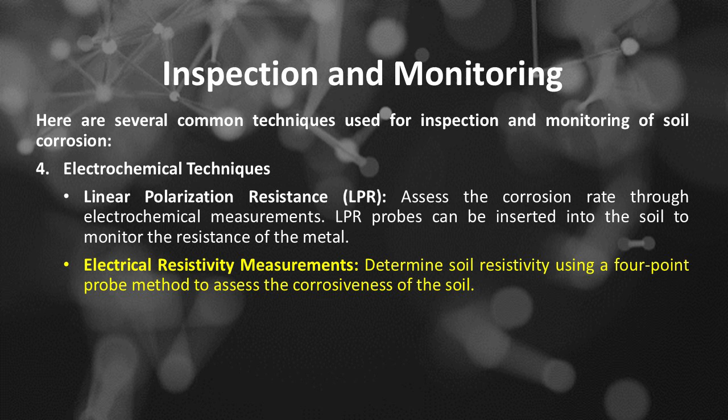Number 5 is cathodic protection monitoring. Potential measurements: regularly measure the potentials of cathodic protection systems to ensure they are functioning correctly and providing effective protection. PSP, pipe-to-soil potential: measure the electrical potential between the steel structure and the adjacent soil to evaluate cathodic protection performance.

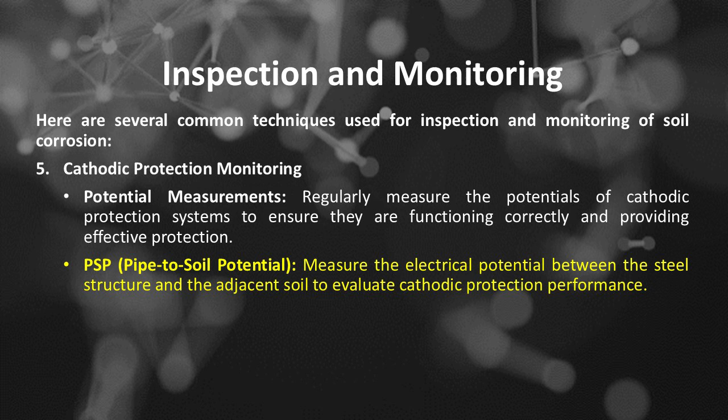Number 6 is ultrasonic testing, or UT. Wall thickness measurement: use ultrasonic thickness gauges to measure the wall thickness of pipes and tanks. A reduction in wall thickness can indicate internal or external corrosion. Surface scans: ultrasonic testing can also identify flaws and defects in materials.

Number 7 is magnetic particle testing, or MPT. Surface flaw detection: this method detects surface and near-surface defects. It is particularly useful for identifying cracks and pits on ferromagnetic materials.

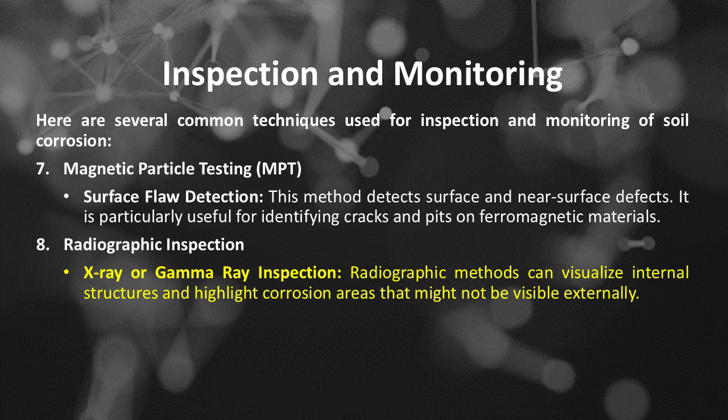Number 8 is radiographic inspection. X-ray or gamma-ray inspection: radiographic methods can visualize internal structures and highlight corrosion areas that might not be visible externally.

Number 9 is ground-penetrating radar, or GPR. Non-destructive method: use GPR to visualize subsurface conditions, identifying anomalies that may indicate corrosion or deterioration of buried structures.

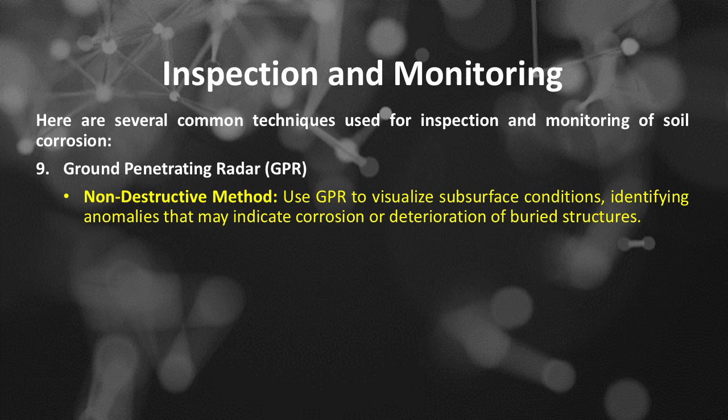Number 10 is vibration monitoring. Structural health monitoring, SHM, uses vibration sensors to monitor changes in the vibrational characteristics of a structure, which may indicate the onset of corrosion and structural integrity issues.

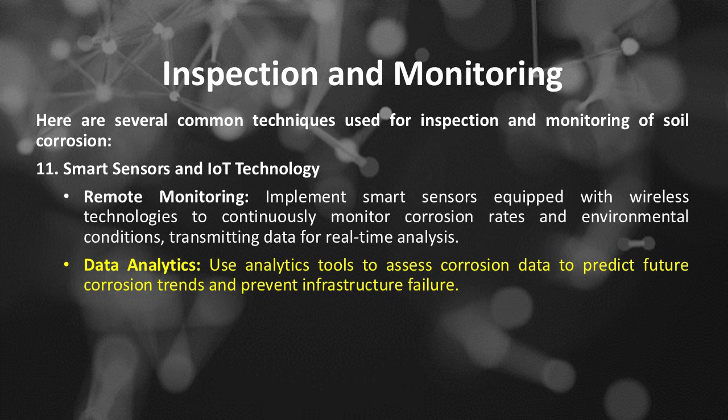Number 11 is smart sensors and IoT technology. Remote monitoring: implement smart sensors equipped with wireless technologies to continuously monitor corrosion rates and environmental conditions, transmitting data for real-time analysis. Data analytics: use analytics tools to assess corrosion data to predict future corrosion trends and prevent infrastructure failure.

Number 11 is aerial and drone inspections. Mapping and imaging: employ drones equipped with cameras and sensors to assess large areas for visual signs of corrosion or surface degradation, especially in hard-to-reach locations.

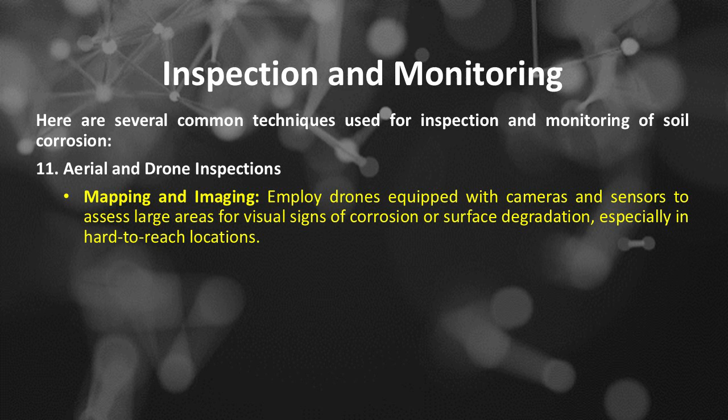In conclusion, implementing a combination of these inspection and monitoring methods can provide a comprehensive approach to detecting soil corrosion damage. Regular assessments and proactive measures can help manage corrosion risks, ultimately prolonging the lifespan and safety of buried infrastructure. It is also essential to tailor the choice of methods to specific environments, materials, and types of infrastructure to achieve the best results.